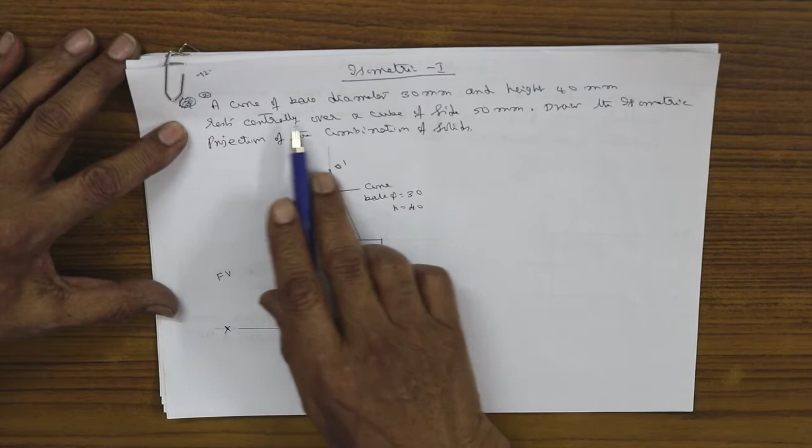Now we proceed to solve problem number 2 in isometric 1. Problem 2 goes like this: a cone of base diameter 30 mm and height 40 mm rests centrally over a cube of size 50 mm. Draw the isometric projection of the combination of solids.

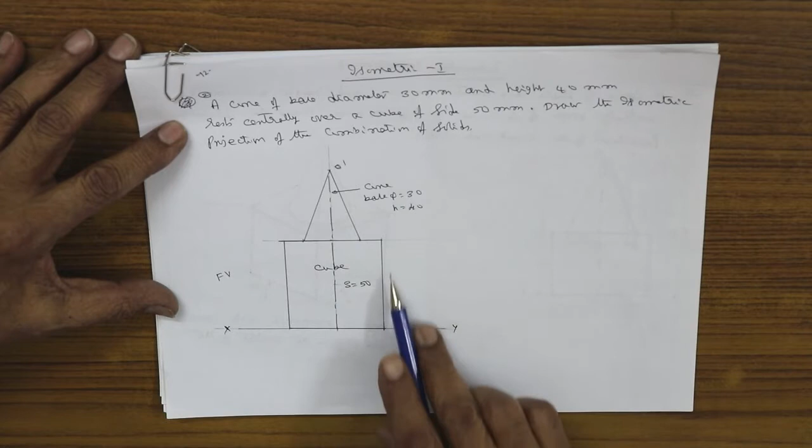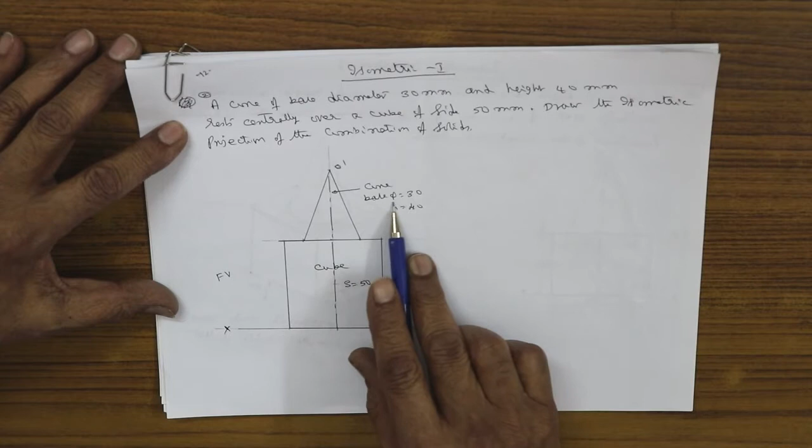In the previous problem we saw a sphere on the cube. Now we have a cone on the cube. Cube dimensions are the same, a 50 mm cube, and the cone base diameter is 30 and height is 40 mm. I have drawn here the orthographic front view: the 50 mm cube, and a cone above it, centrally placed. This cone has base diameter 30 mm, height 40 mm.

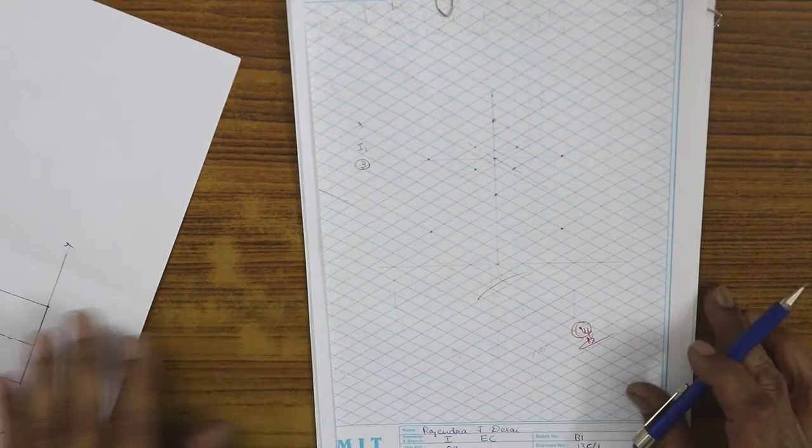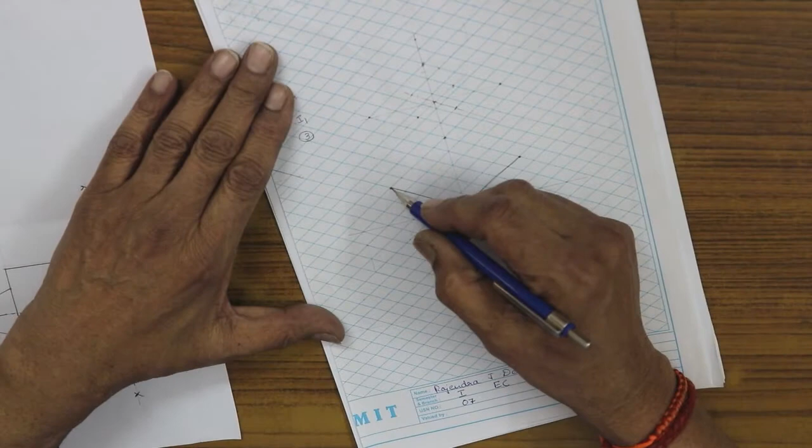How to draw this in isometric projection? The answer goes like this. Again, I'll give the demonstration on the isograph sheet itself. Let me draw the cube, 50 mm cube. This is the 50 mm bottom box. The 50 mm box is ready. Take the height from here, 50 mm. Repeat the top 50 mm box. I'm just repeating it slowly.

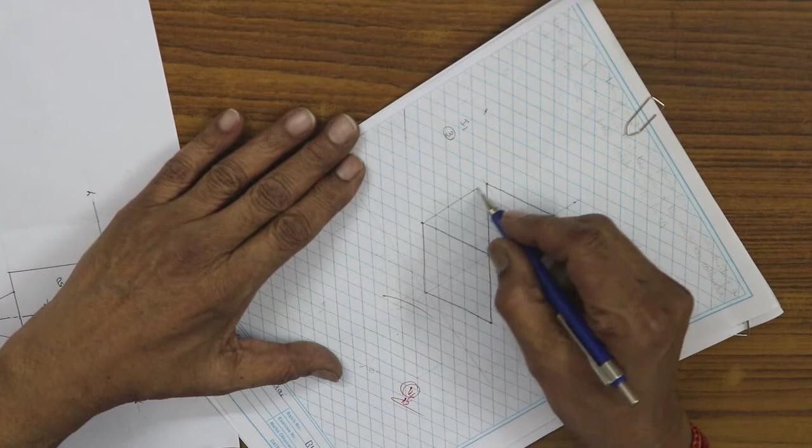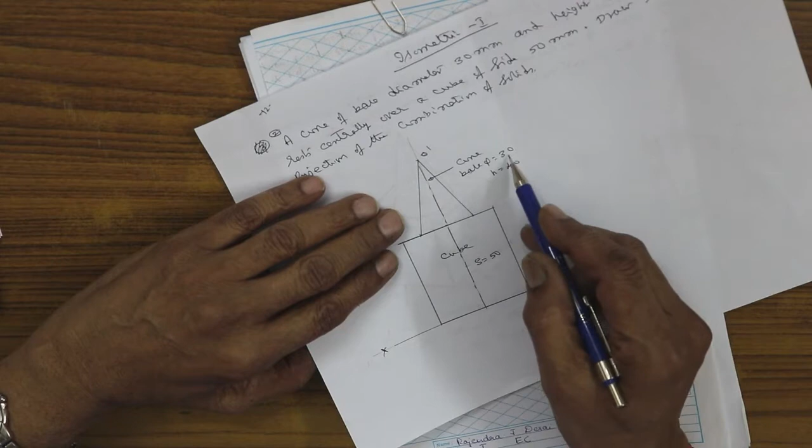All these are with the H pencil, until I finally use the HB pencil. Connect corner to corner. The cube is ready. Now exactly at the center I should draw the cone. The cone base diameter is 30 mm. It is horizontally placed, which means I should draw a horizontal ellipse. I should draw a 30 mm box inside and get the horizontal ellipse. Let me do the center to center method.

Draw a 30 degree line in the middle, and again a 30 degree line in the middle. From the center you measure 15 mm, 15 mm, and again 15 mm, 15 mm. Then draw parallels through those points in this manner. You automatically get the 30 mm box ready.

Then here you have to prepare the ellipse. Draw the ellipse by the 4-arc method, which I taught you already. So draw the ellipse here using the 4-arc method or 4-center method, which I explained earlier.

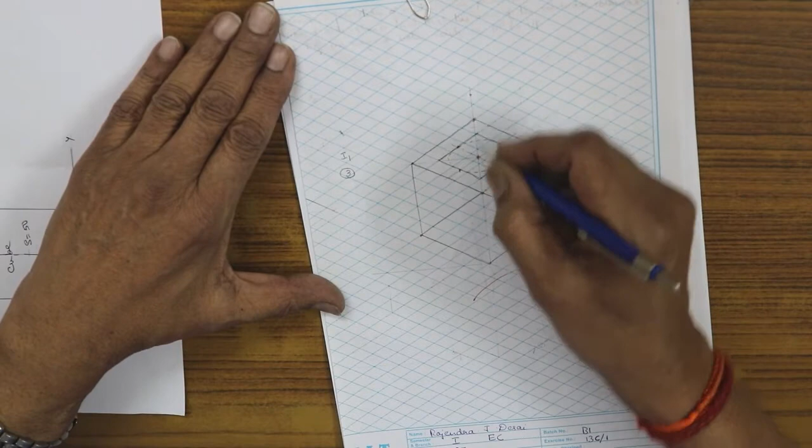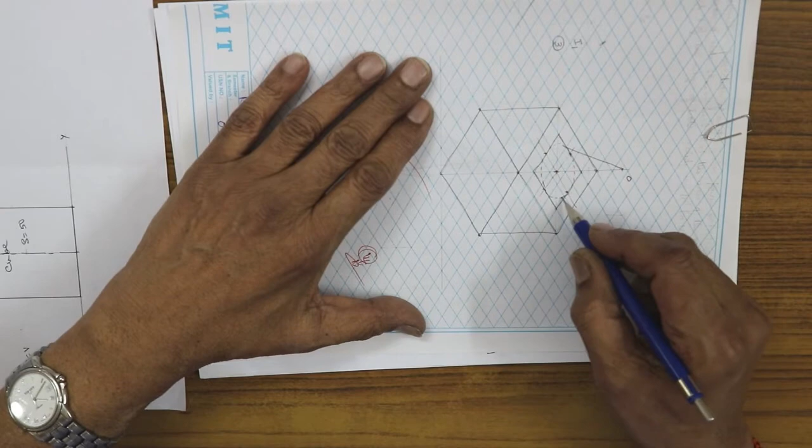In case of a cone and a pyramid, you always measure from the center of the base. From here you measure. The height is 40 mm: 5, 15, 25, 30, 35, 40 mm. From here to here you measure the iso 40, and that is the apex point. From the apex point you draw tangents to the base ellipse. That's how you complete the cone construction.

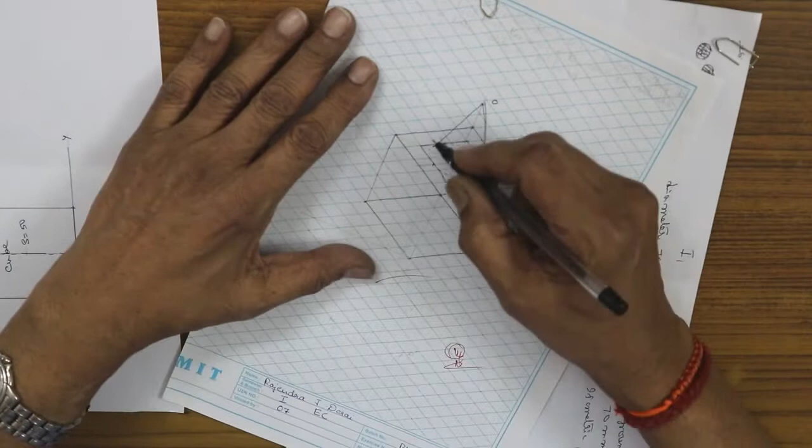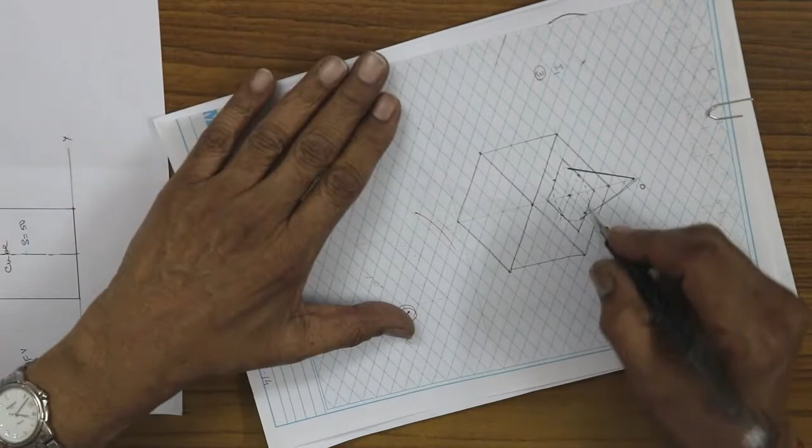So let me complete the answer by drawing with the HB pencil. Draw the tangent to the base ellipse from the apex point, and again the other tangent from the apex point. The ellipse is visible outside; inside it is not visible. You have a center, so you can draw the axis.

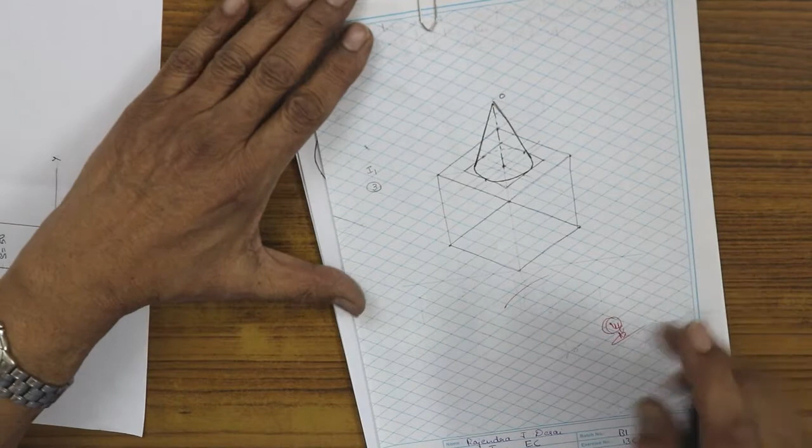Then the top of the cube is partly hidden by the cone. Up to this is visible. Then the edges, 50 mm, all isometric measurements 50 mm. Again, it is visible this way. There's the cube.

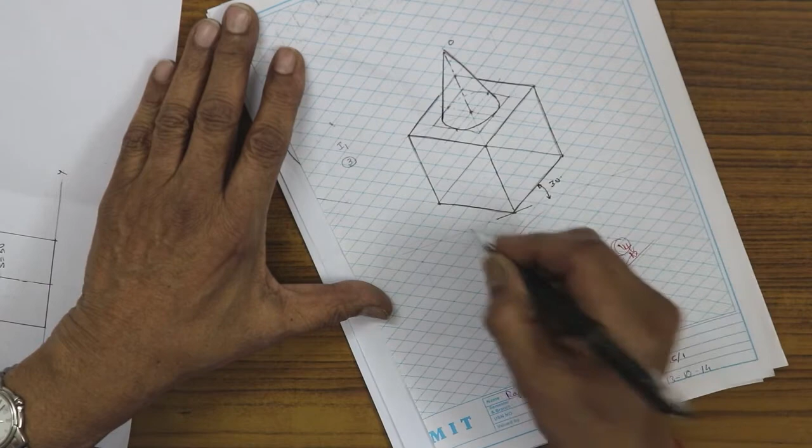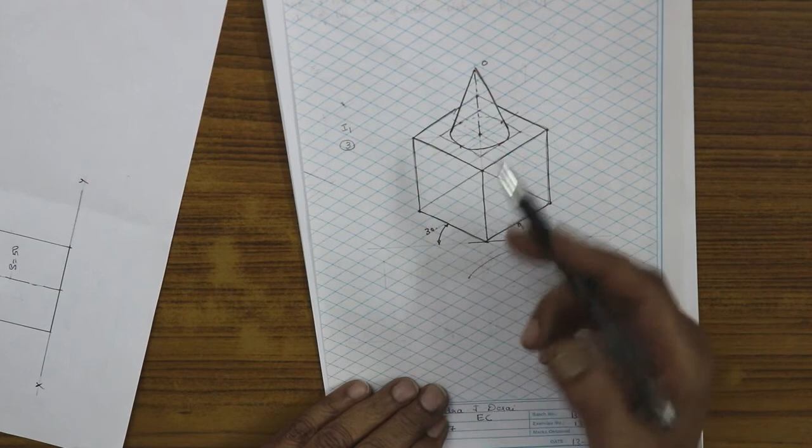And we have these angles, which you have to mention as usual. This is a 30 degree angle, this is a 30 degree angle, this again is a 30 degree angle. That's how you complete the cone with a horizontal ellipse. One should be very comfortable in preparing the ellipse, horizontal and vertical. Please practice well, as I told you already, and take the height correctly.

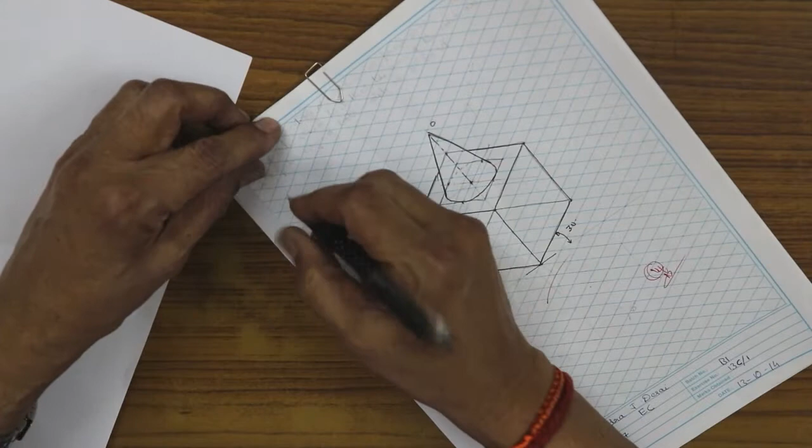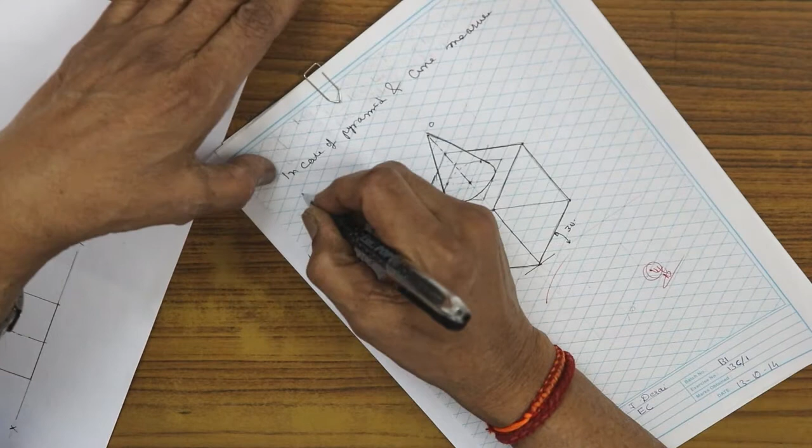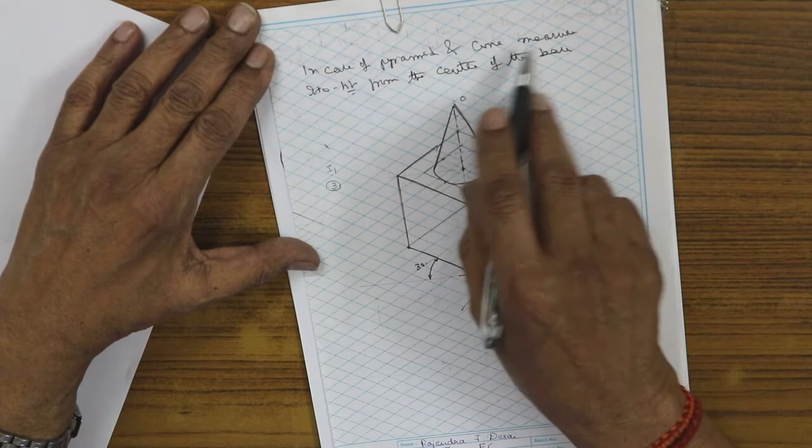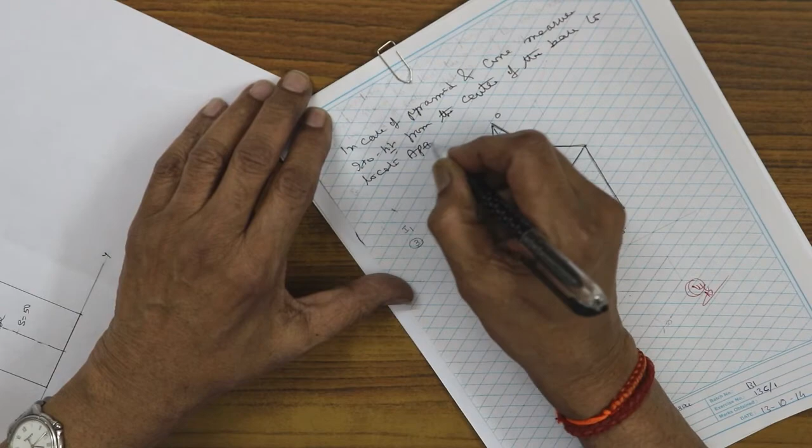In case of pyramid and cone, I'll give one small hint again, and I'll write it here: in case of pyramid and cone, measure the iso height from the center of the base. Never measure from the box. Measure from the center of the base to locate the apex point, the vertex point.

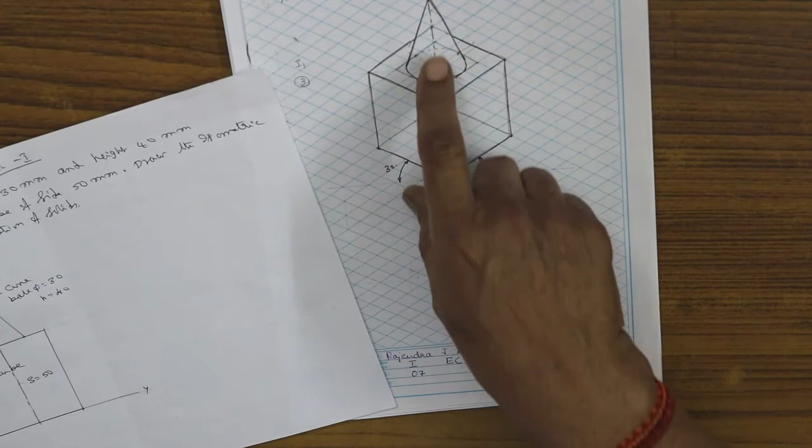This is a very simple problem, and it has appeared in exams very frequently: a cone resting on a cube. I have drawn the cube and the cone with the help of the iso sheet that I supplied to you. This is a simple procedure. I think everything is clear in drawing the answer.